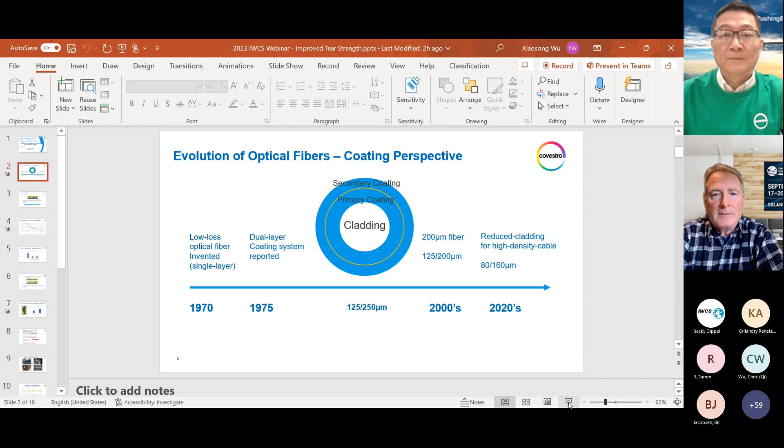Are you seeing okay, Dave? Yeah, you might want to put it in full presentation mode, Xiaosong. Well, in my computer it is already full presentation. It does not appear in full presentation mode yet. Do it again. Okay, sorry. Now I'm going to say slideshow. The button at the bottom. It's not in full presentation mode. Interesting. I'm going to do it one more time. If not, we might have to stay in the PowerPoint slides. I'm not sure why it's not showing the slideshow. Now there you go. Yes, excellent. Two times is a charm. It looks good now. Okay, great.

So now it's already Friday afternoon in Europe, Friday evening in Asia. So I'm not going to overwhelm everybody with many slides. Rather, I'm going to keep it concise and to the point. And along the way, let us have some fun going through the story of optical fiber and more specifically optical fiber coatings.

So as we are aware, the current modern optical fiber has a glass cladding in the middle. There is also a small core, which I did not show here, just to keep it simple. But there are also two layers of coatings. The first layer is called primary coating. The second layer is called secondary coating.

However, just like many things in life, we should not take this for granted, because if you look at the history of how optical fibers came about, in 1970 the very first low loss optical fiber was invented. That is 53 years ago. At that time, on top of the glass cladding, there was only one layer of coating, a single layer coating system. Five years later, there was a breakthrough in 1975. It was reported that a dual layer coating system could significantly reduce microbending.

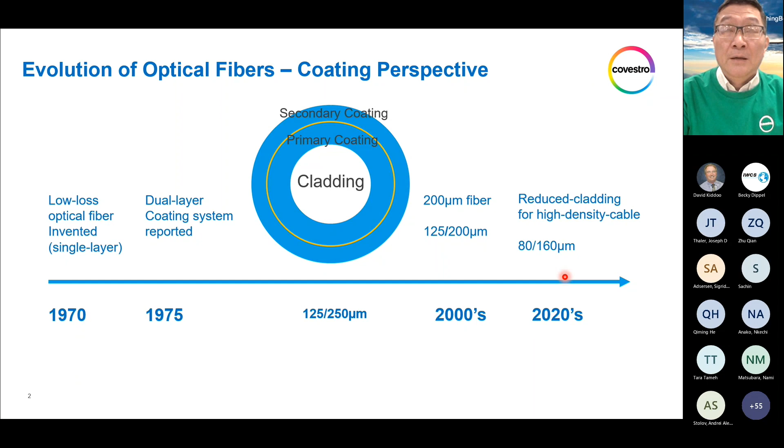So with this change, what is always concerning and always of great interest for improvement has been microbending. This is a schematic representation taken from the publicly available lightwaveonline.com website about the principle of microbending. It is actually pretty simple. This is an illustration of a coated optical fiber. Any physical irregularities on the surface in contact with the fiber could perturb the fiber into small radius bends that can cause microbending.

So the focus here today is not all the physics to calculate or predict microbending. The focus here is we need to realize that in reality what could cause microbending are the fiber-to-fiber interaction and the fiber-to-cable material interaction in our industry, right? So we just need to remember this, okay? This is the microbending fundamentals.

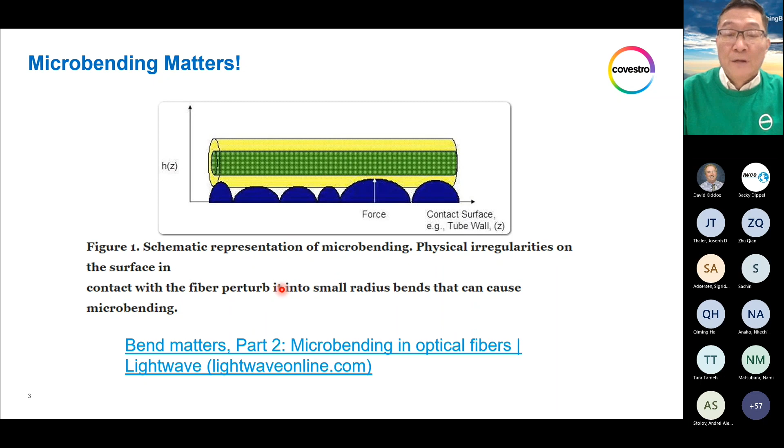So now go back to that configuration I just talked about. You have glass cladding, then you have primary coating, secondary coating, right? So the soft primary coating serves as a cushion to absorb all the forces coming from different sources, right? Lateral force. So the primary coating is a cushion to absorb all those forces so that any forces transmitted into the fiber could be reduced. Therefore, it is natural to reduce primary coating's Young's modulus, so that the cushioning effect becomes greater and greater for more modern and more challenging fiber configurations.

So let's look at the evolution of primary coating Young's modulus over years, along with optical fiber evolution. Remember the 1975 paper? In that paper, the Young's modulus of the primary coating was 100 megapascal. Now, when people realized the benefit of dual coating configuration, the primary coating Young's modulus decreased dramatically. In the 1980s, it had already reduced from 100 megapascal to somewhere between 2 and 3 megapascal. In the 1990s, it was further reduced to only above 1 megapascal. Then in 2000, about 20 years ago, it was reduced to slightly below 1 megapascal.

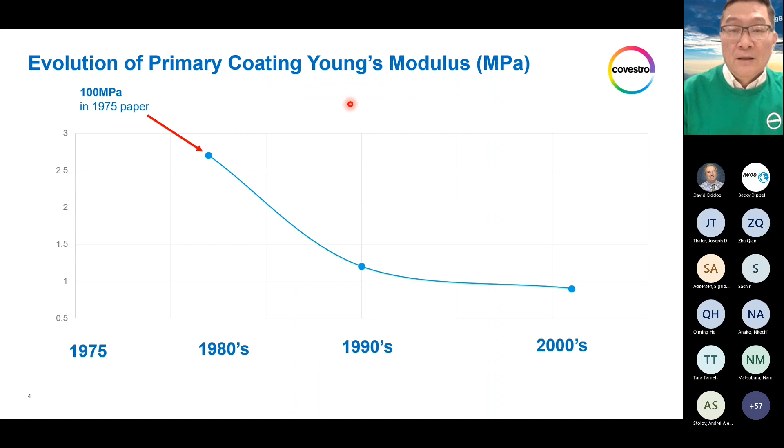So now comes the first highlight of this paper, of the current innovation. Remember, the modulus reduced from 100 megapascal to below 1, which means 100 times reduction in about 25-30 years. So now I want to present the latest innovation that we have developed. There are commercial materials from Covestro with an in situ modulus, which is slightly different than Young's modulus. Young's modulus is measured on the cured film. In situ modulus is measured on fiber directly, so this is the true primary coating modulus. It has a certain correlation with Young's modulus. So we're talking about the in situ on-fiber modulus.

Current coating material is about 0.5, so 0.49 megapascal. The next generation coating, primarily for reducing microbending, was reduced to 0.16 or 0.15 megapascal. These two numbers are of the same coating on different fiber samples from a customer trial, very close. So we're talking about a 70% reduction in in situ modulus. So remember, this is one key point for the highlight: we were able to reduce the in situ modulus about 70%.

However, just like with any changes, there comes risk. In 2006, we presented a paper at IWCS about the risk coming with a very soft primary coating, because in material science, the material strength goes hand in hand with the mechanical property, for example Young's modulus, which means when we reduce Young's modulus gradually over time, there's a risk of losing strength. For example, we have observed some kind of tear or rupture in cured primary coating.

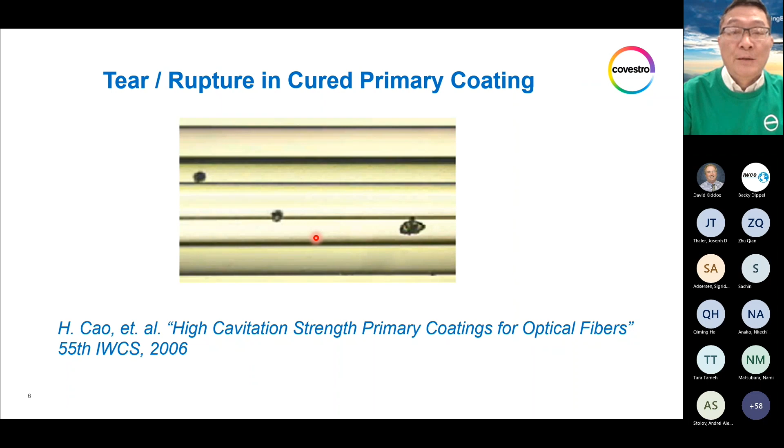So this is a risk, a natural one in material science; it makes sense. It's a risk coming with a reduced modulus material, any material, including the primary coating on top of the optical fiber. So now comes the highlight of today's innovation that we want to share with our customers: the way we measure the strength of the cured primary coating is to utilize a well-known industry method called tear strength. The tear strength is measured by loading a cured film on a tensile machine.

In this case, it's on a DMA machine, right? You load a cured primary coating film. Then next, we make a cut, a well-designed cut according to the ASTM method of tear strength, in the middle of the cured film. Then we pull the cured film apart to measure the force at the time when the film breaks, when this crack propagates to the breaking point. The force is recorded and tear strength is calculated in terms of a term called G0.

Again, the focus here is not to talk about how to calculate G0. The focus here is that with this well-defined method by ASTM, we measured the cured primary coating tear strength of both the current coating and the next generation coating. And tear strength actually increased from 13 joules per meter square to 21 joules per meter square, which is a 60% increase in tear strength.

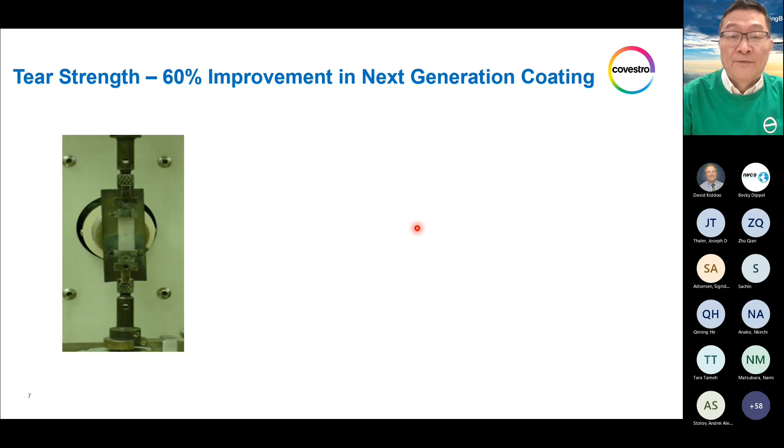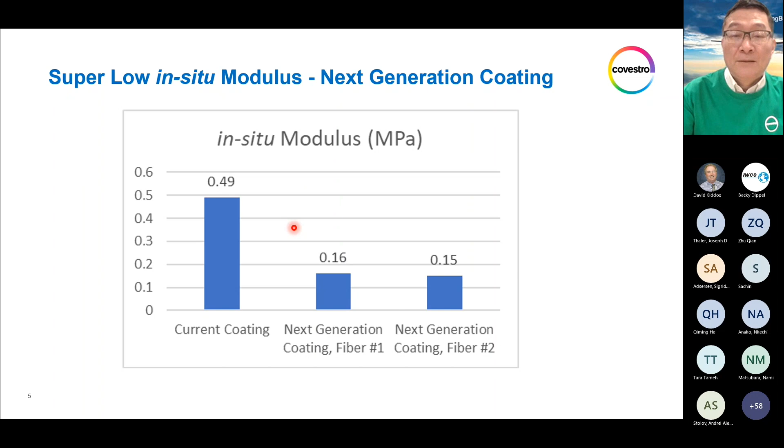So this is the very first highlight I want to reiterate. The next generation dual coating system has a 70% reduction in modulus, but remarkably, it has a 60% increase in tear strength. Therefore, the highlight for this innovation is that the next generation coating system has been reformulated to buck the trend, so that while the in situ modulus decreases, the tear strength actually increases, because we realize the risk with the reduced modulus material. Therefore, we had to reformulate the material so that the strength will not reduce, and in this case, the strength actually increases as measured by tear strength.

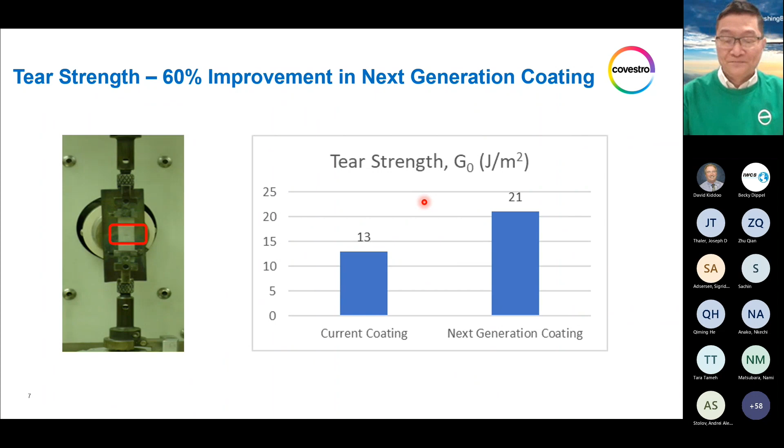So now we took care of the tear strength concern. I'm going to stop the show. Hopefully you can see my video. Can you see my video, Dave? Yes, we can see it.

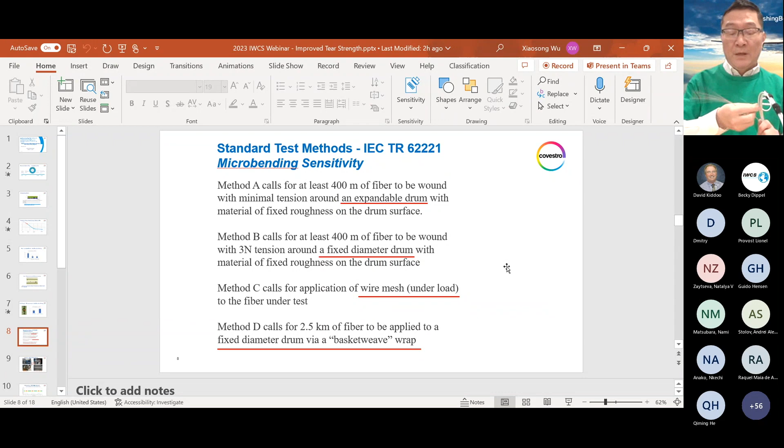Okay, so before I talk about the second highlight, which is microbending, I just want to give us a little bit of a break from looking at these slides. What we're looking at is one of the cables I got from the laboratory. This cable has a lot of loose tube fibers in the middle of the cable. In terms of microbending, there are a lot of methods, and people try to simulate and measure microbending. The challenge is how do we simulate the real world situation in an actual cable?

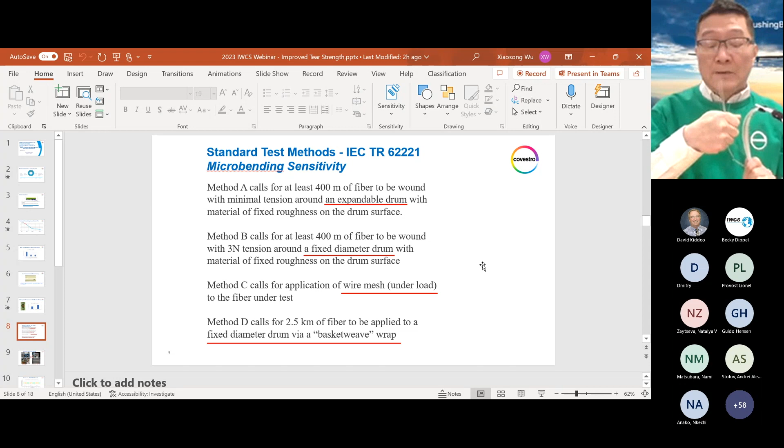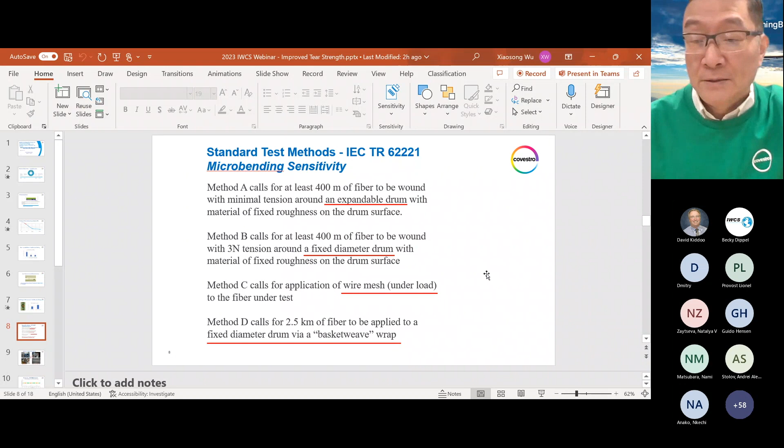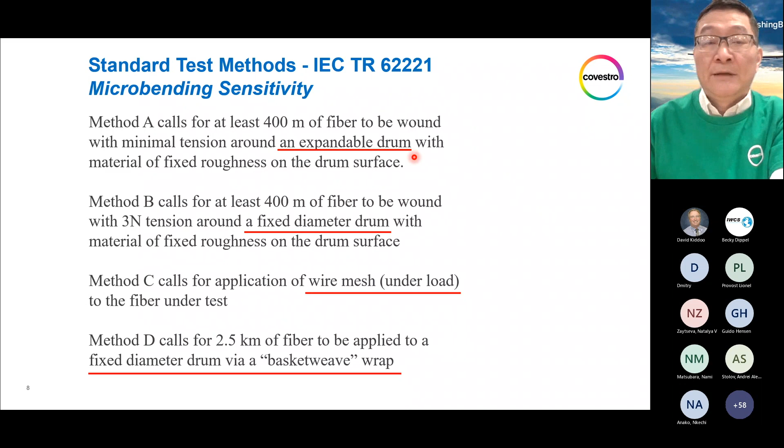As you can see, there are many strings of fibers in this particular cable, which is a loose tube cable configuration. It could also be ribbon, but there's a lot of fiber-to-fiber interaction, which I also mentioned in the previous slides on microbending fundamentals, right? So now I'm going to put it back to the slideshow. There are 4 official test methods by IEC technical report 62221 A, B, C, D. They use different drum sizes; some even use wire mesh or sandpaper to create lateral force.

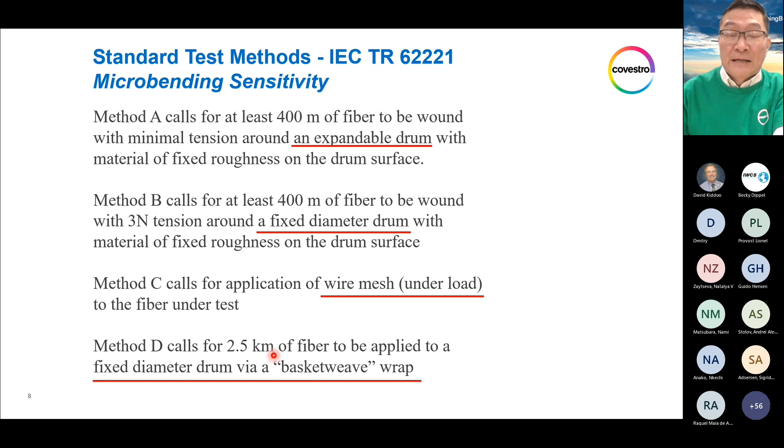However, there's one method called method D, which utilizes a basket weave, which means you wind the fibers just like a basket weave, to create a fiber-to-fiber interaction to simulate. So this is actually in our laboratory, winding the fibers according to all the parameters in method D of the IEC technical report, right? It has a well-defined pitch, well-defined take-up, tension, and layer by layer.

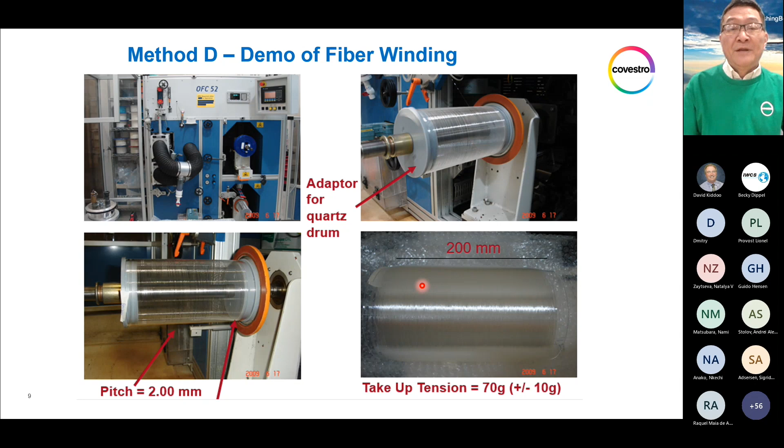The next layer has a different winding direction to intentionally create those cross fiber points that simulate the fiber-fiber configuration, the fiber-fiber interaction that could cause microbending loss. So this is the key reason why we picked method D among the 4 methods. In this particular paper and innovation, we intentionally conducted the microbending test with method D.

On top of method D, we also performed the test in a temperature cycling fashion, because we realize that not only microbending, but more specifically low temperature microbending, is essential to winter month performance of the optical network when fibers are in the cable.

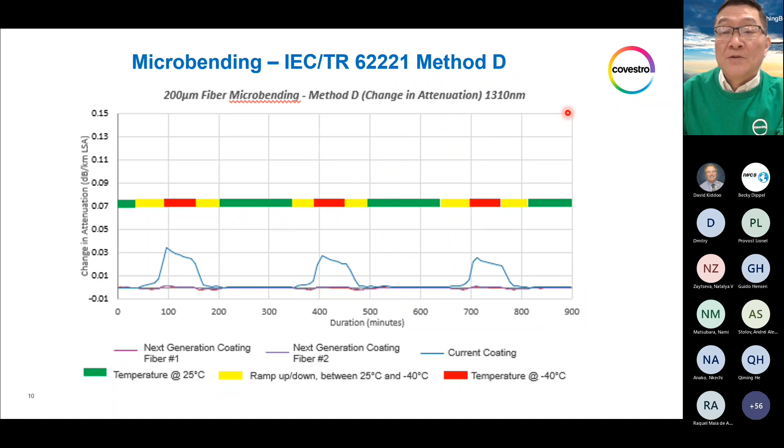To summarize, we only look at the minus 40 degrees C results, which is these 3 regions, and take the average of 3 cycles, then compare the 2 systems, the current system in blue and the next generation system in orange, at 1310, 1550, and 1625 nanometer. It's well known that when the wavelength increases, the attenuation value increases, as well as the change in attenuation.

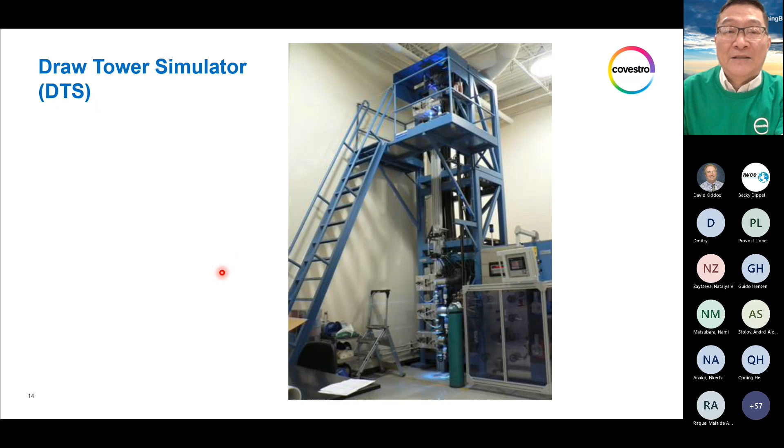So now I'm running out of time. The next part is about draw tower simulator results of the 2 coating systems. You can find all the results in the actual IWCS paper that we published last year in October, which is not the highlight of the current paper. The 2 highlights of the current paper are improved tear strength, which I have talked about in the previous slides.

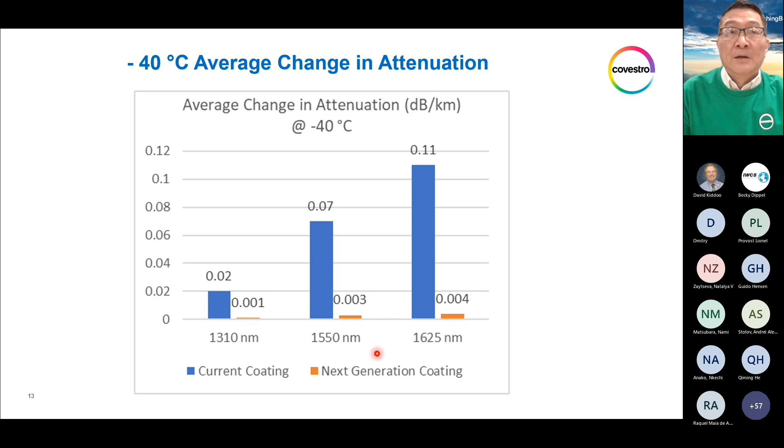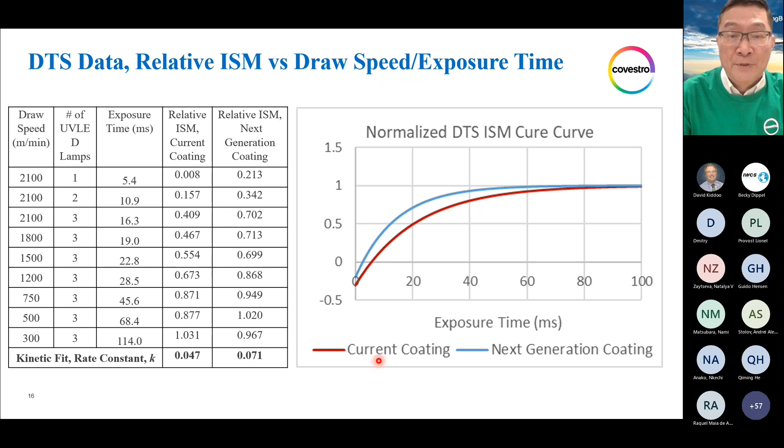I'm going to jump into the final conclusion, which I say, it's already Friday afternoon, Friday evening in Europe, in Asia. So all you have to remember is as simple as 1, 2, 3. So you remember 1, 2, 3.

So what is 1? 1 is we have developed a next generation coating system, which is a family. So this is not a single coating. It's a family of next generation primary coating systems, coatings, which we can tailor make for various customers, depending on customer needs. So what are the 2? So as simple as 1, 2, 3.

2 is there are 2 benefits or 2 improvements. The first improvement or benefit is an improved tear strength. So 60% improved tear strength over the current system, while the in situ modulus was reduced by 70%. The second improvement or benefit is a superior low temperature, which is minus 40 degrees C in this case, low temperature microbending resistance, particularly at high wavelength, specifically 1625 wavelength.

So what is 3? 3 is there are also 3 draw process capabilities. So we have not forgotten that the fiber has to be able to be manufactured under the modern manufacturing conditions. For example, super high draw speed, as high as 3,000 meters per minute and even beyond. The second aspect, helium consumption rate optimization or reduction.

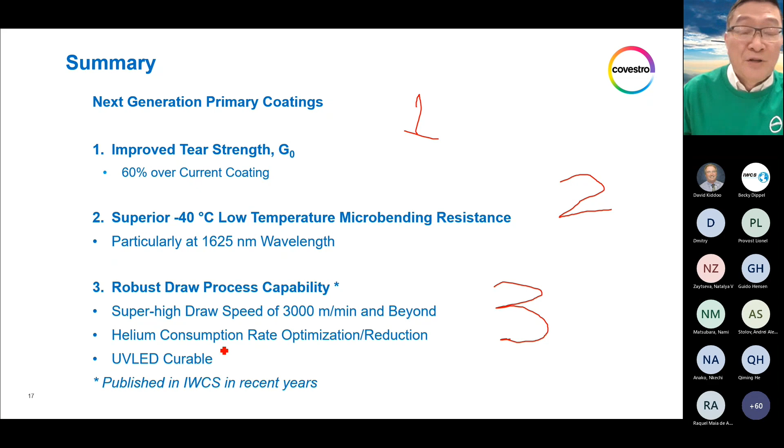And the third, it has to be hybrid cure capable, which means it can be cured with the traditional microwave UV lamp, as well as the upcoming UV LED lamps, as many customers are transitioning into UV LED lamps. So all those coatings, these new generation coatings, are UV LED curable. So there are 3 robust draw process capabilities.

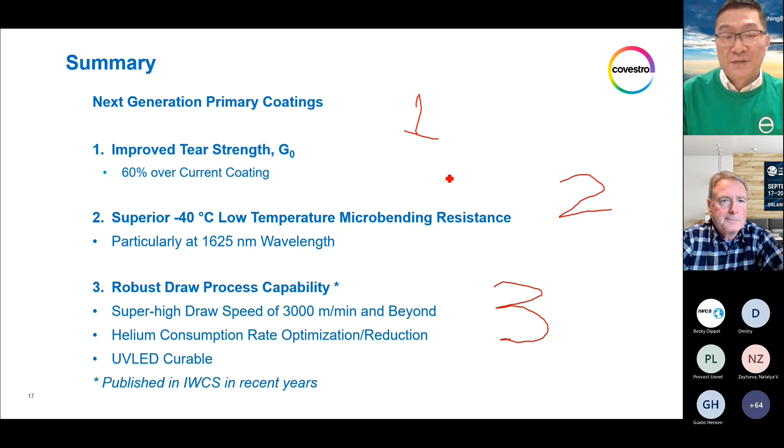By the way, all those 3 capabilities have been published in the recent IWCS papers. So you can find the detailed description of the respective innovations in recently published IWCS papers. So to take home, all you have to remember is 1, 2, 3. 1 family of coatings, 2 benefits, 2 improvements, and 3 robust draw process capabilities.